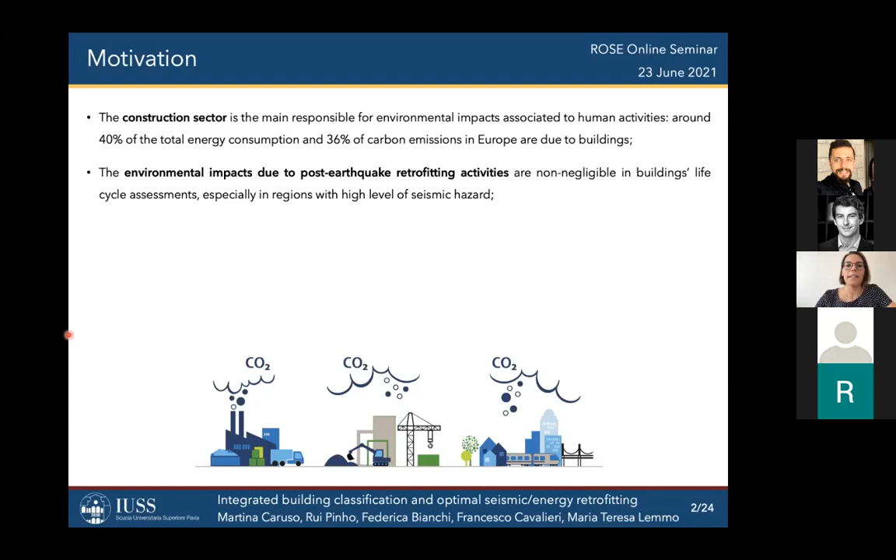When we describe a strong seismic event, we are used to describing it through the number of deaths, injured people, homeless people, or by the economic losses associated to post-earthquake retrofitting activities or to business inactivity. However, we cannot anymore neglect the fact that post-earthquake retrofitting activities do also produce environmental impacts.

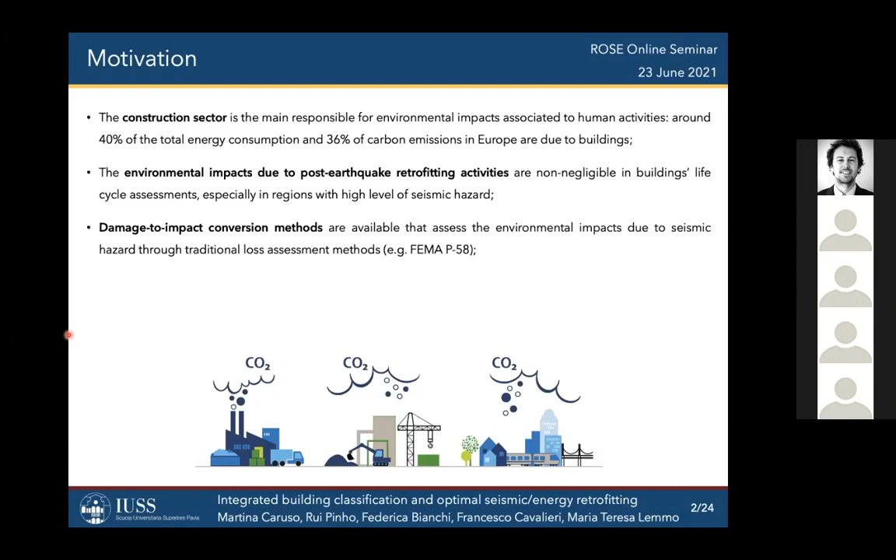And those contributions should be included into traditional life cycle assessment. To do so, we have several methods that allow the conversion of building components' damage into environmental impacts, so that we can use environmental impacts as a decision variable within traditional loss assessment methods.

Lastly, there is a need for a methodological framework for integrated assessments of buildings that consider multiple performances of the building itself. In our discussion, we will include both seismic and energy performances, and also for impact evaluation, metrics that are meaningful for the identification of optimal retrofitting strategies.

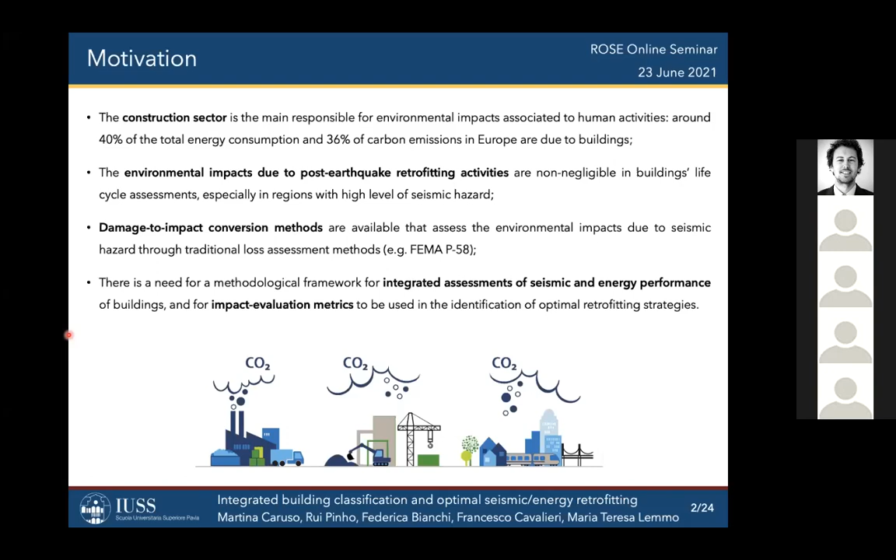So I will start with a brief overview of the life cycle framework that we developed. That is, of course, based on the existing life cycle analysis and life cycle cost analysis procedures, but it includes the contribution of potential earthquakes also.

So the first life cycle stage that we consider usually for buildings is the construction process, which usually includes raw material extraction, transportation of those materials to the factory, and the installation process within the construction site.

Then we can move to the operational phase of the building, which is the phase in which people and occupants use the building. We will define several sub-phases within the operational phase.

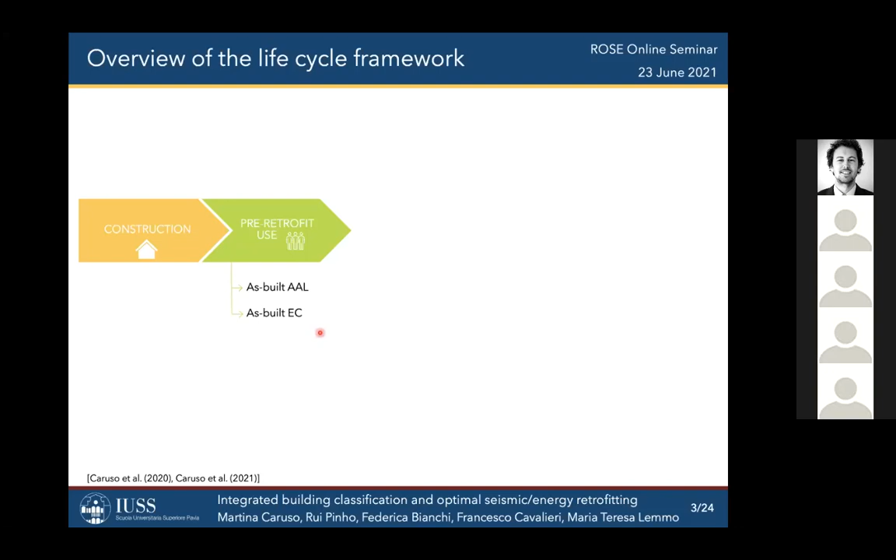The first one is the use phase before a retrofitting intervention is made in the building. In this operational phase, we will consider the contribution of potential earthquakes in terms of average annual loss, what we call AAL, due to seismic hazard, and the energy consumption of the building.

Then we may need to do a retrofitting intervention on the building, which may or may not be consequent to an earthquake occurrence. In that case, we should, of course, consider both post-earthquake repair activities and the retrofitting intervention.

Concerning retrofitting interventions, we may have sole seismic strengthening, or energy efficiency refurbishments only, or even integrated interventions that are aimed at reducing both seismic vulnerability and energy consumption.

So the next step is the estimation of average annual losses and energy consumption, considering the effectiveness of the retrofitting intervention adopted for the building.

Lastly, we have the demolition phase, which is the end-of-life stage of the building, in which we considered the demolition of both construction and retrofitting materials.

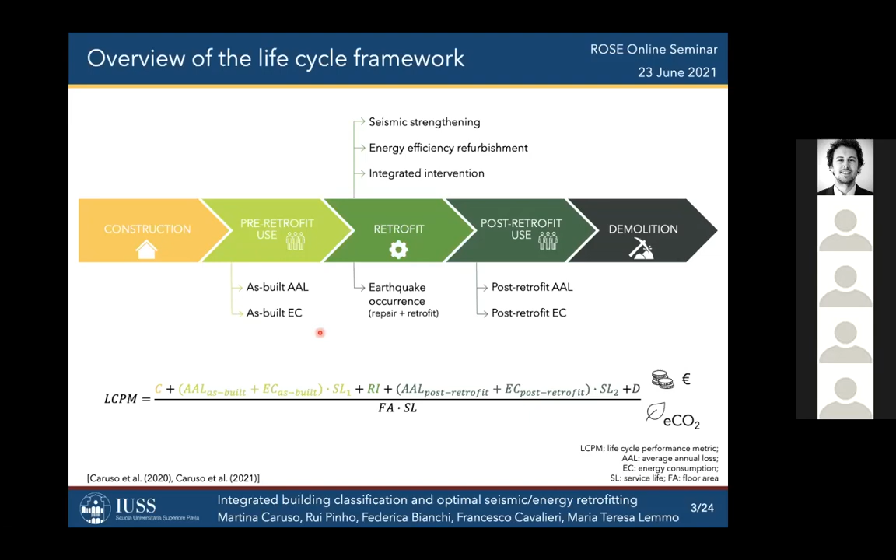So wrapping up, we will have a big summation of the contributions of each of those stages, in terms of the life cycle performance metric, or LCPM, that we decided to use as performance metrics: costs in euros, and environmental impacts in terms of equivalent carbon dioxide.

All those contributions, as you can see, are normalized, just to be more general, by the total floor area and the total service life of the building.

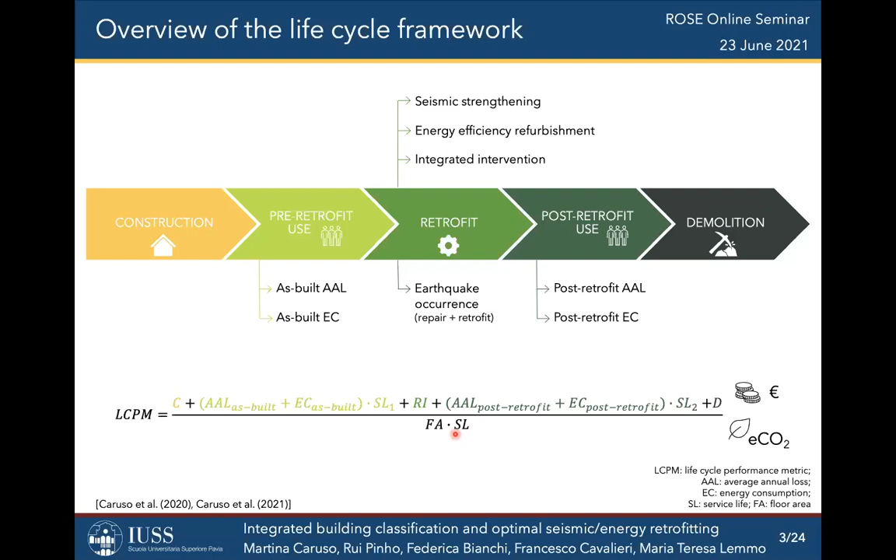This kind of evaluation may be useful when we are comparing different buildings that belong to different building typologies, for example concrete, masonry, or steel, or maybe a newer building compared to existing ones. But if we deal with just a single building, we can focus only on the post-retrofit stages, because the pre-retrofit ones are, of course, the same for a single building.

So when we are evaluating which retrofitting option is the best one for a building, we can introduce a new integrated classification, based on post-retrofit annual costs and emissions, estimated as we previously discussed, which is inspired by already existing energy and seismic risk classification schemes.

But it is quite different, for two main reasons. The first is related to the performance metrics used as a basis for the classes, which are again costs and emissions. And the second is because we are considering seismic and energy performances together in an integrated manner.

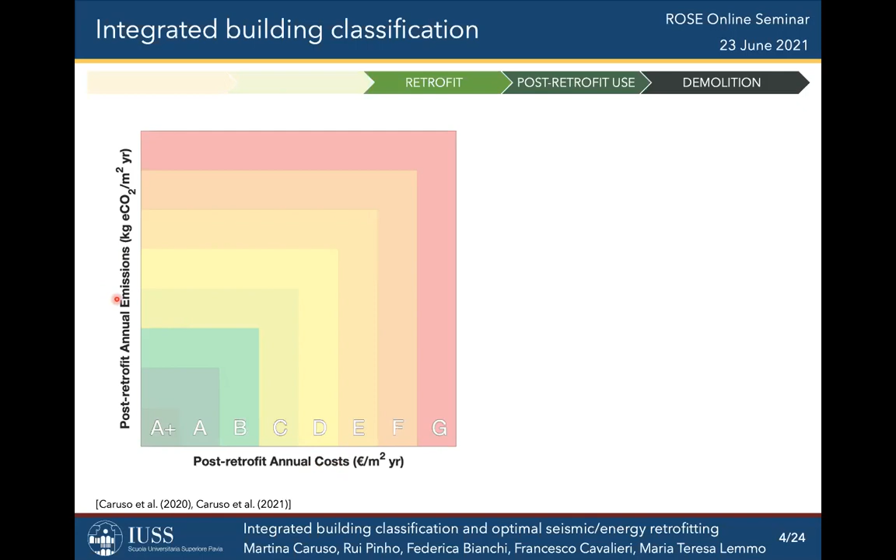So now I want to do a hypothetical example for a building located in central Italy. Assume we have calculated post-retrofit costs and emissions for the as-built configuration, and that we get a class D.

Now we want to design a retrofitting intervention for this building. We can try with a seismic strengthening only, or with a sole energy efficiency refurbishment. What we can see here is that a sole seismic strengthening gives a very high reduction in terms of costs, but a very limited reduction in terms of emissions.

On the contrary, the energy refurbishment gives a very limited reduction of costs, but a very significant reduction in terms of emissions. So what I wanted to show through this example is that, in order to guarantee a class upgrade, we would need an integrated reduction of both costs and emissions, and that just reducing one of those may not be enough.

So considering that central Italy is a region characterized by very high seismic and energy demands, we can also think about an integrated intervention that may guarantee one or even two class upgrades.

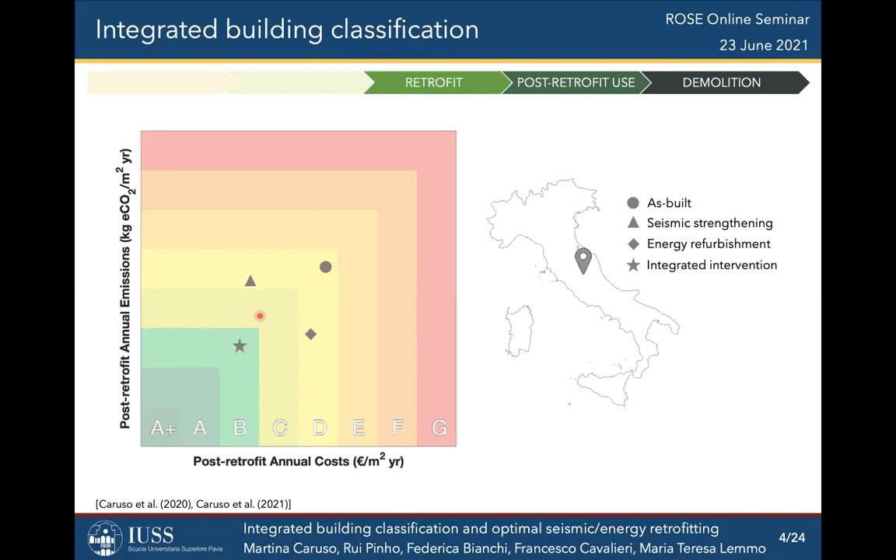To understand better our framework and our proposal for this classification scheme, we will go through the application of the framework to a case study building, which is an existing school building in central Italy, which looks like this. As you can see here, we will go through each step, each life cycle stage.

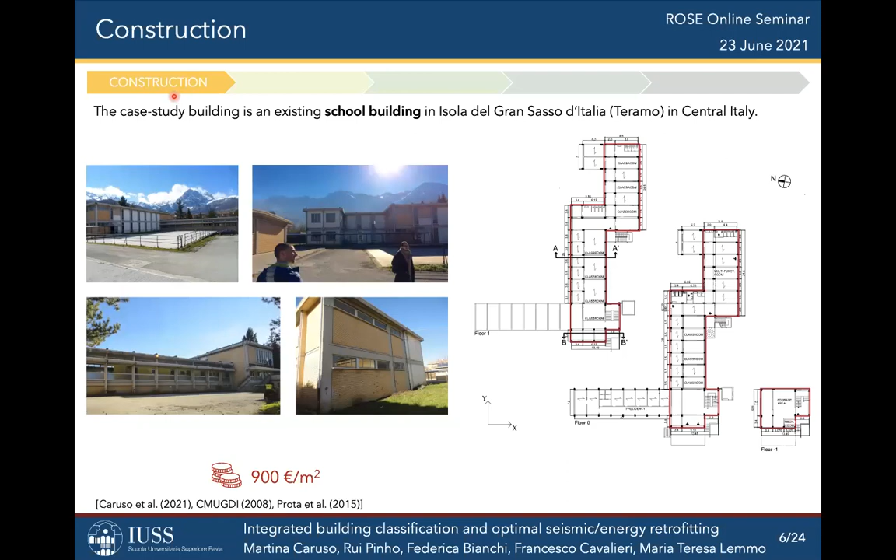For each of those, I will provide economic and environmental estimates. Starting from costs, we assumed a 900 euros per meter squared construction cost for this building. Concerning environmental impacts, we used a specific method for life cycle assessment called economic input-output method, and we used a web tool which is available to perform this method and which is referenced in this presentation.

So what we need to use this method is an estimate of dollars of expense in a specific construction sector, that in our case is the construction of a school building. The web tool will be able, depending on the quantity of expense in that sector, to give estimates of environmental impacts per $1 million of expense.

What we can immediately understand is that this method is quite approximate because it is only based on the assumption that, given an expense in a sector, we are able to calculate the corresponding environmental impacts. We deemed it was fine for our first application, but in the second application we are working on these days, we decided to perform a more accurate life cycle assessment, called bill of material life cycle assessment, that consists in the definition of all the components and all the materials within the building to get the corresponding environmental impacts.

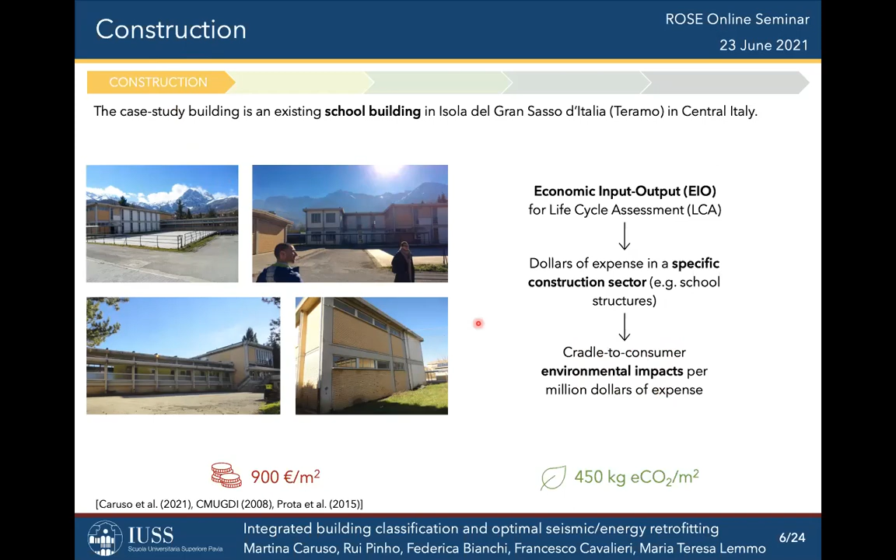Then we can move to the operational phase before the retrofitting intervention is made. Again, here we will estimate the average annual loss due to earthquakes and the energy consumption. Starting from the earthquake loss assessment, we decided to use the FEMA P58 approach.

I'm sure most of you are familiar with this approach, so I will not go too much through the details, but I will just describe in general the steps that are part of this approach. The FEMA P58 approach is a fully probabilistic method to estimate losses that are expected in a building given the seismic hazard at the site.

So once we know the building and we know the site of interest, we can perform step one, which is the seismic hazard analysis, in which we are mainly answering the question: how frequently will an event of intensity IM occur in our site?

Step two is the structural analysis of the building, for which we need a numerical model for our building, and we need to perform structural analysis that may be nonlinear static procedures or pushover, or nonlinear dynamic analysis. The result of step two are the so-called engineering demand parameters, or EDP, which result in the building due to the occurrence of the event defined at step one.

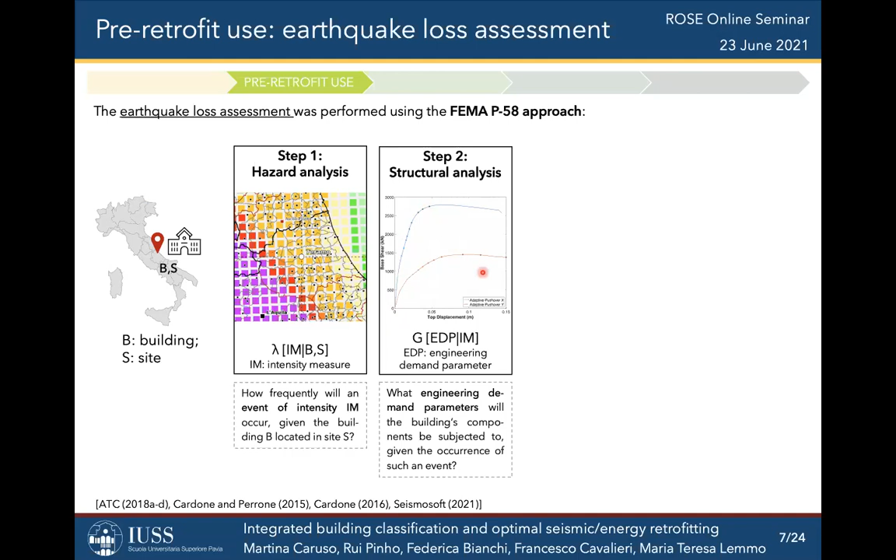For our application, we used pushover analysis, and we used the N2 method to assess the EDPs at 9 different seismic intensity levels. EDPs may be, for example, interstory drift ratios or floor accelerations or velocities.

Step 3 is instead damage analysis. At this step, we need to collect an inventory of vulnerable components in our building. In our application, for example, we considered structural reinforced concrete components like beam column joints and masonry non-structural components like external infills or internal partitions.

For each component, we need the so-called fragility function that provides the level of damage that is expected in the component given the attainment of the EDPs defined at the previous step.

Lastly, step 4 is the loss analysis. For this step, we need instead what we call consequence functions. So for each damage state considered for each component, we know which repair activity we would need to repair our components. The consequence functions are, for example, in terms of costs or carbon emissions that are produced by the repair activities needed to repair each damage state considered.

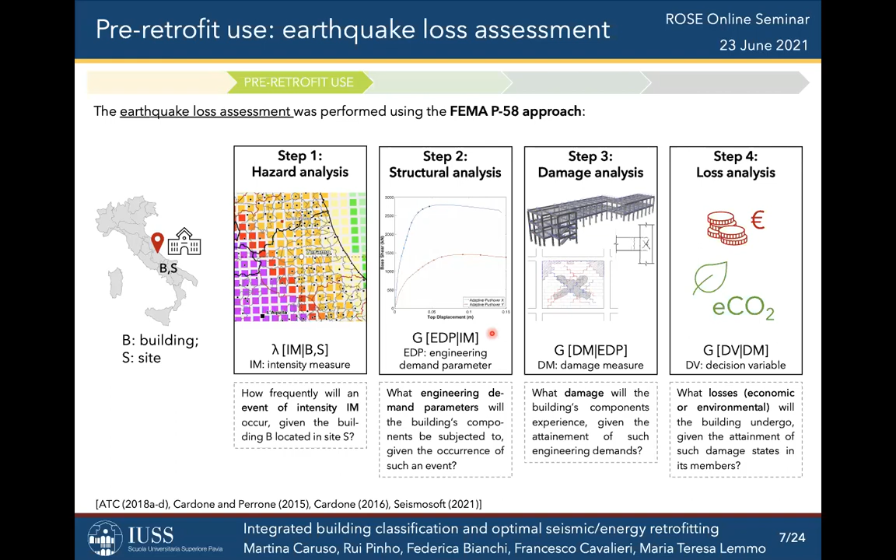So the results are finally in terms of loss curve. This is the economic loss curve, and in terms of average annual loss, which was estimated to be around 5,000 euros per year, or in other terms, 0.38% of the replacement cost.

Concerning environmental impacts, I want to spend just a few words on how we developed the consequence functions in terms of equivalent carbon dioxide emissions. Once we had a detailed description of the repair activities needed for each component, we could estimate the quantity of materials needed for each repair activity, and finally use the inventory of carbon and energy database to get our estimate of environmental impact per kilos of material.

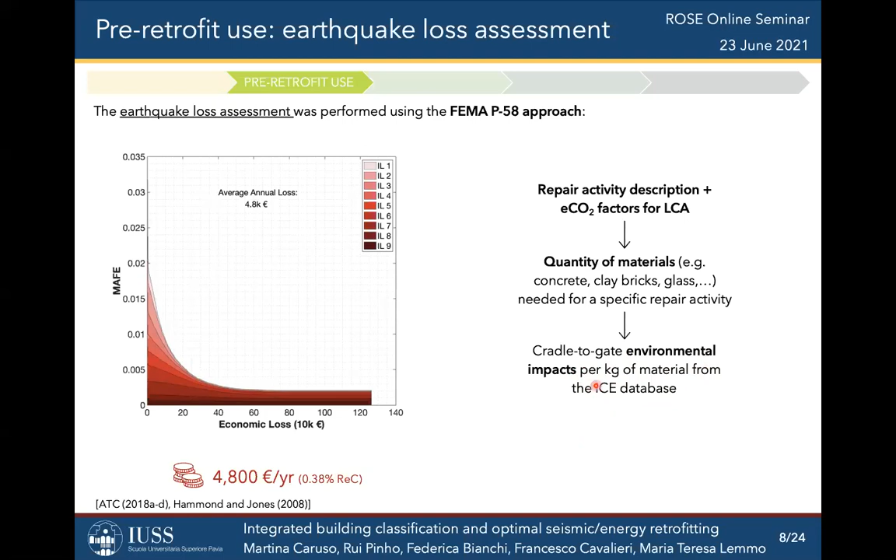The results are again in terms of environmental loss curve, and the average annual emissions expected in the building are more or less equal to 2,000 kilos of equivalent carbon emissions per year. Also 0.28% of the replacement impact.

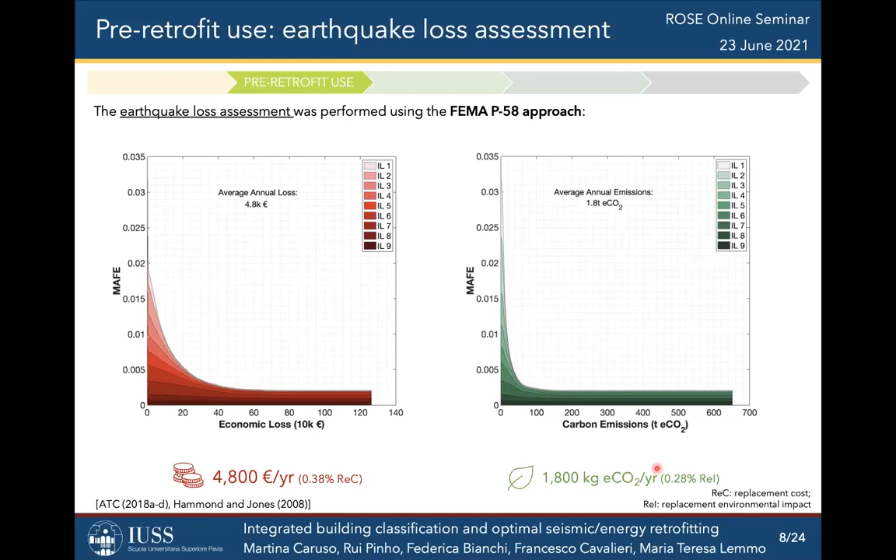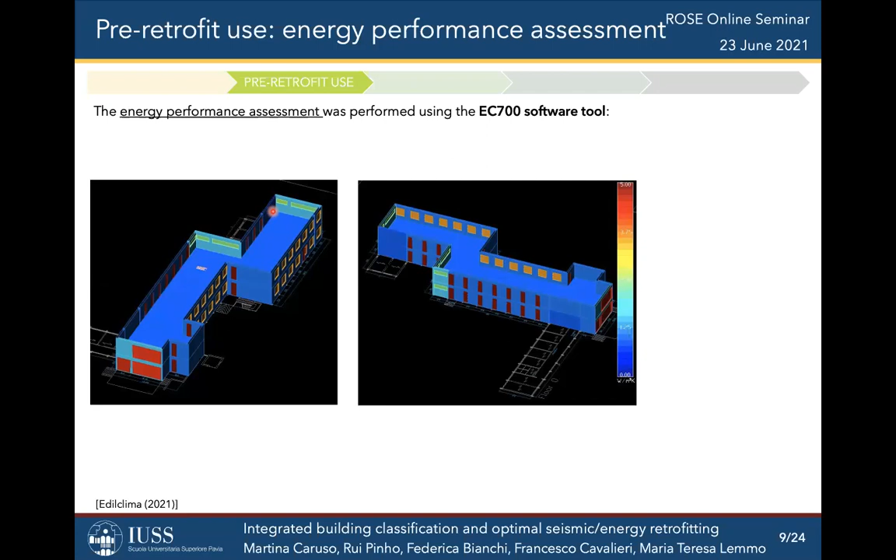Concerning instead the energy performance assessment, we decided to use a software called EC700, developed by Edilclima. We built our model and performed energy calculations in static conditions so that we could estimate the energy needs for the building and the energy class, which in our case was E. For this first application, we just focused on the energy needs for heating the building, whilst in future applications we want to include energy needs for cooling, ventilation, illumination, and so on. This was just for the sake of simplicity for the first application.

The results are shown here: 27,000 euros per year and 53,000 kilos of equivalent carbon dioxide per year. What you can immediately notice is that there is a difference of about one order of magnitude with respect to the estimates resulting from the earthquake loss assessment.

And the reasons we found were mostly two. The first one is related to the specific architectural configuration of the building, which features very large openings along the building vertical envelope. The second reason is related to the type of analysis we did, which was in static conditions. So we assumed an average temperature value to be constant within the season considered to estimate energy needs for heating the building. So those results may be quite conservative.

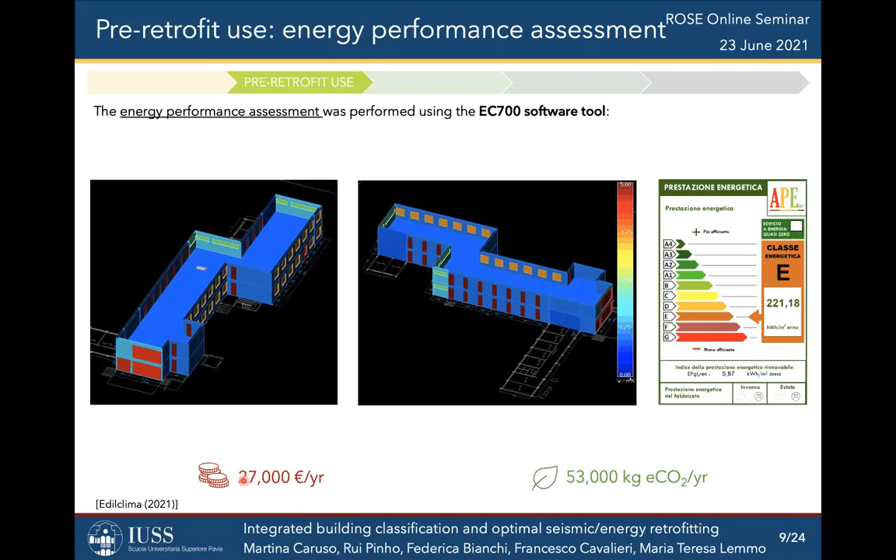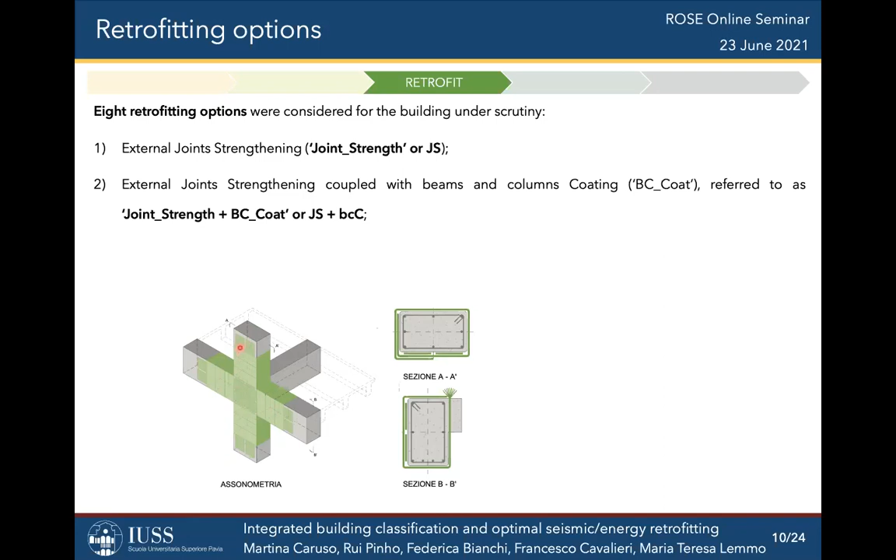Then we designed 8 different retrofitting options for this building, including seismic strengthening options, energy efficiency refurbishments, but also integrated options. The first one is a strengthening option because it consists in the strengthening of external beam column joints through the application of steel reinforced polymer, or SRP sheets, as you see here. The second option is just an extension of the first one, in the sense that we proposed to extend the application of such sheets all along the external columns and beams. This is not a solution of common practice, but we were interested in including it because we were trying to avoid the formation of thermal bridges due to the material discontinuity over time between SRP and concrete.

The third option is instead an integrated option that couples the external joint strengthening with the application of a 2 centimeter thick insulation layer all over the vertical building envelope.

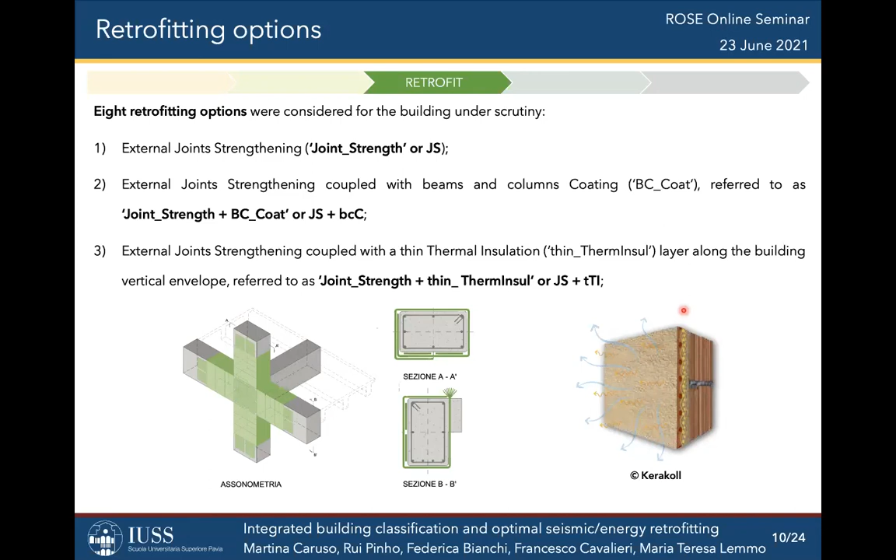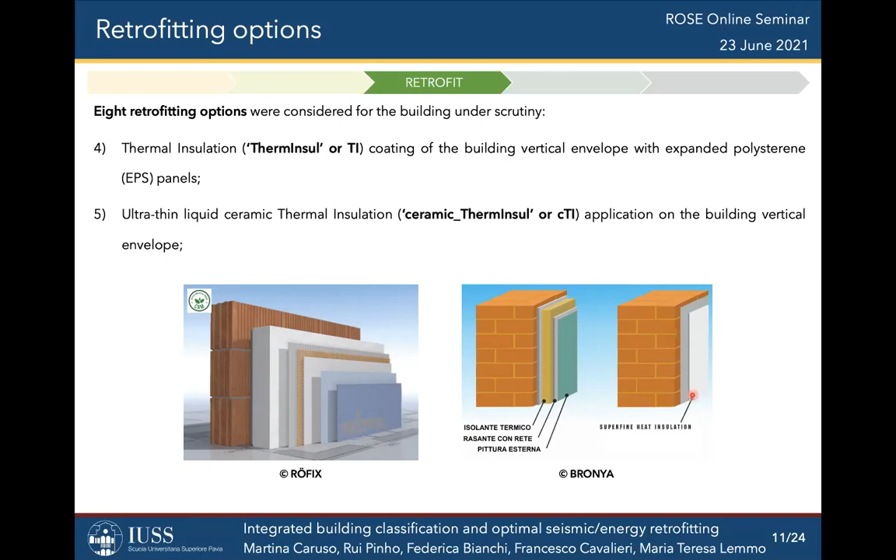The fourth and the fifth options are instead energy efficiency refurbishments. The first one is a traditional solution for thermal insulation by the application of expanded polystyrene panels, or EPS panels, whilst the fifth option is an innovative solution with a 2 millimeter thick application of a ceramic layer all along the building envelope that performs equivalently to an 8 centimeter thick EPS panel.

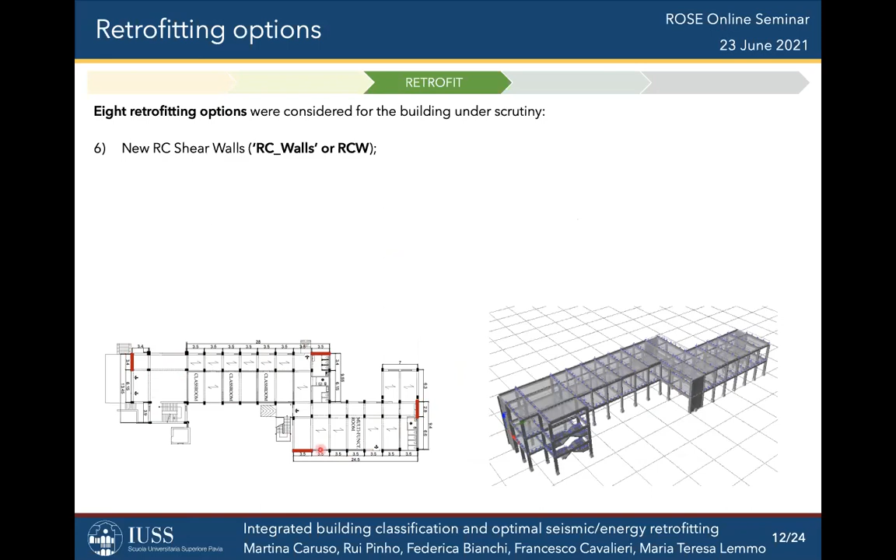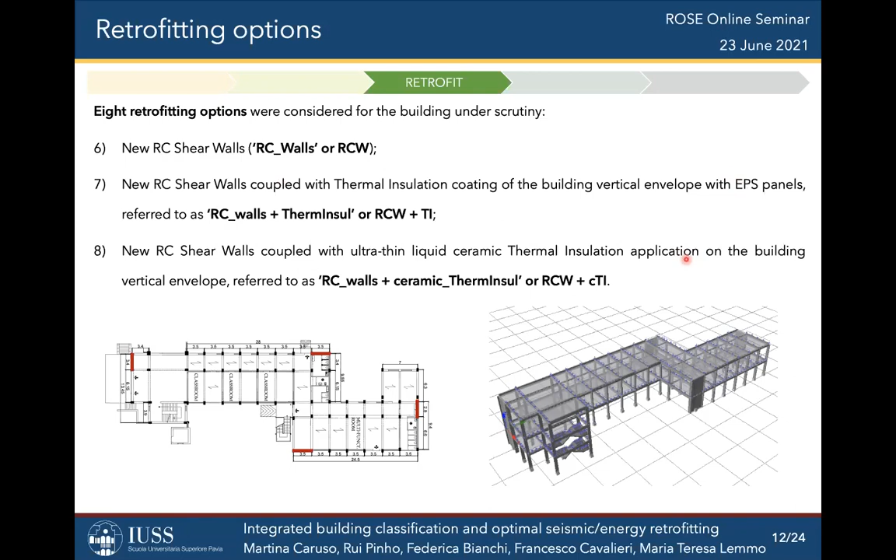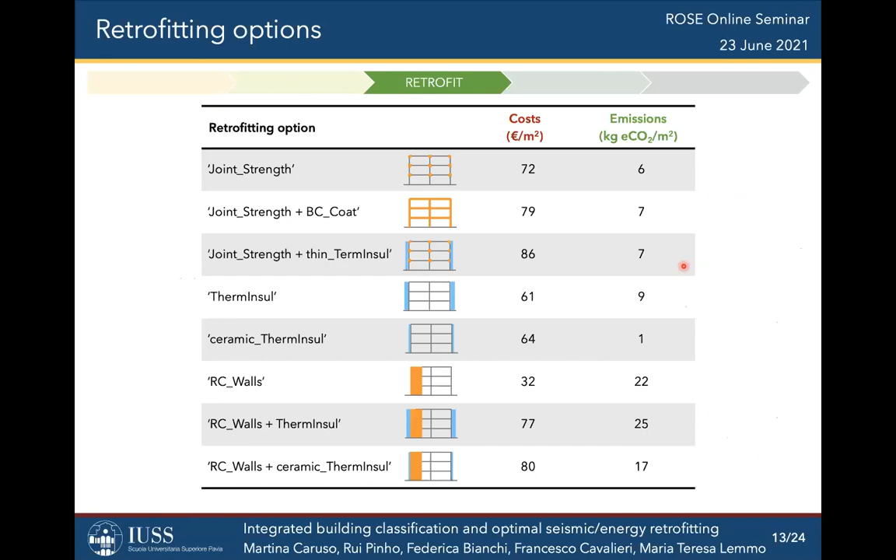The sixth option includes the introduction of 4 reinforced concrete shear walls in our building, 2 per principal direction, as you see in plan and in the numerical model. The 7th and the 8th options are integrated options that couple reinforced concrete shear walls with EPS panels and ceramic application, respectively. For each of those retrofitting options, we could estimate both costs and emissions due to the installation process.

Then we can move to the use phase after the retrofitting intervention. And it is clear that the results of the earthquake loss assessment and of the energy performance assessment will be influenced by the effectiveness of the different interventions.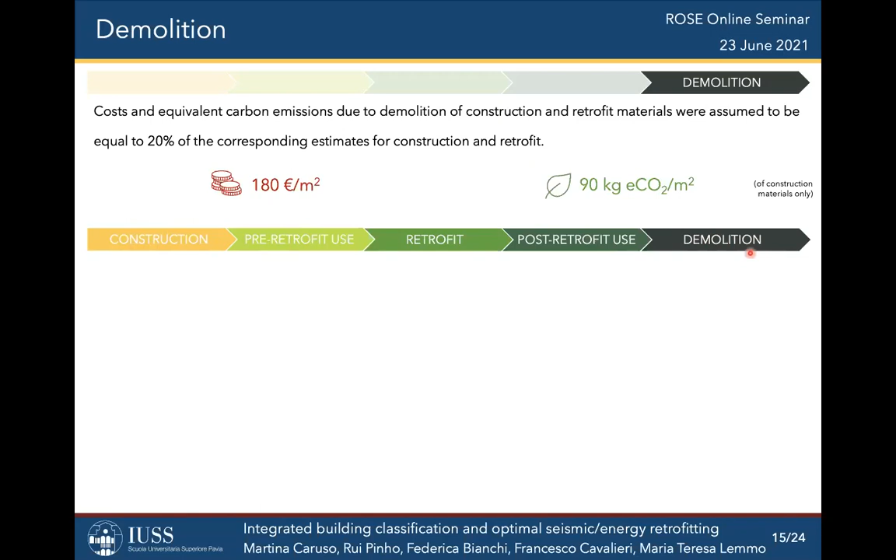However, we know that the demolition of buildings produces a very large amount of waste, and we cannot imagine today that all this waste would just be transported to landfills without any alternative options. So in future applications and developments of the framework, we will move to a circular life cycle, which includes a new phase consisting of the reuse and recycling of demolition materials. This will be perfectly coherent with circular economy principles, because the demolition waste will be reused and recycled and put back into the market to start a new life cycle for another building or product in general.

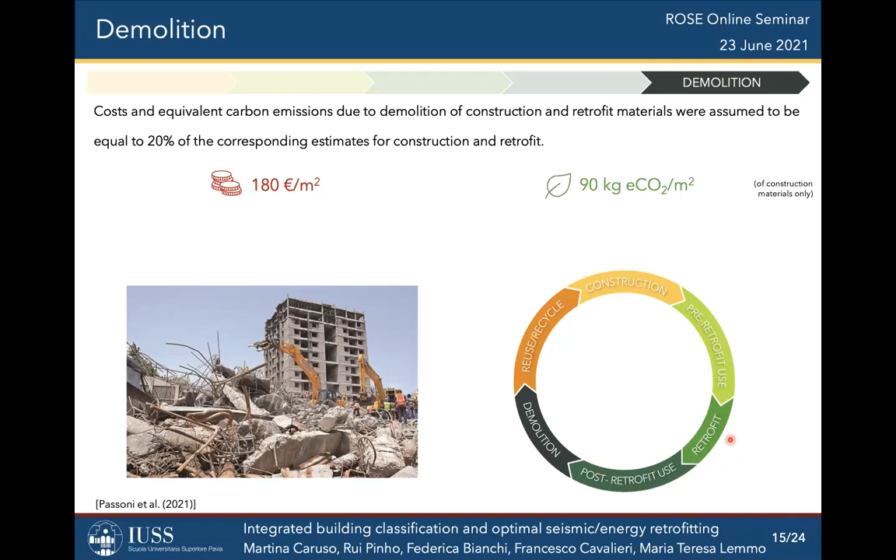Another thing I want to say is that up to now we just considered retrofitting options that are traditionally used in engineering applications. However, several researchers today, like Passoni et al., are working on more sustainable retrofitting solutions designed so that after demolition of the building, we can completely reuse and recycle those retrofitting materials. This is one of the best things we can do when dealing with existing buildings.

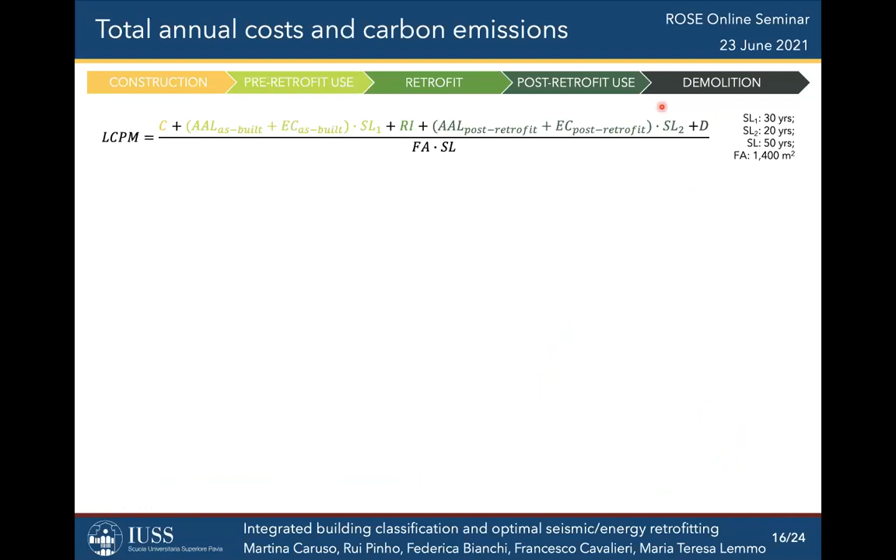Coming back to our framework, now we have all the contributions we are interested in. I will show the results for the as-built configuration and for each retrofitting option. But as I said before, these evaluations may be useful when comparing different types of buildings, because the pre-retrofit phases are of course the same for a single building. So I'm presenting these results just for the sake of completeness.

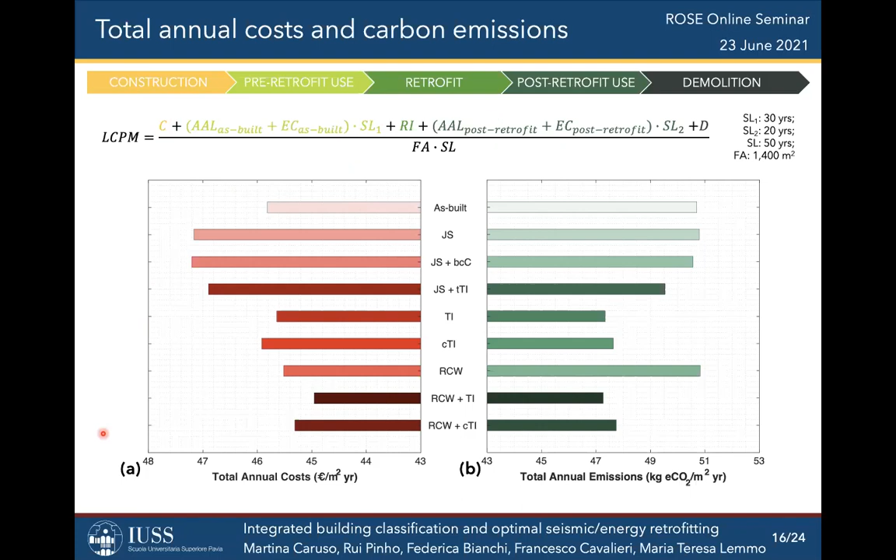If we consider that we are interested in identifying the best solution for a single building, in our case the school building in central Italy, we can just focus on the post-retrofit stage and use costs and carbon emissions as meaningful performance metrics to select the optimal retrofitting strategy.

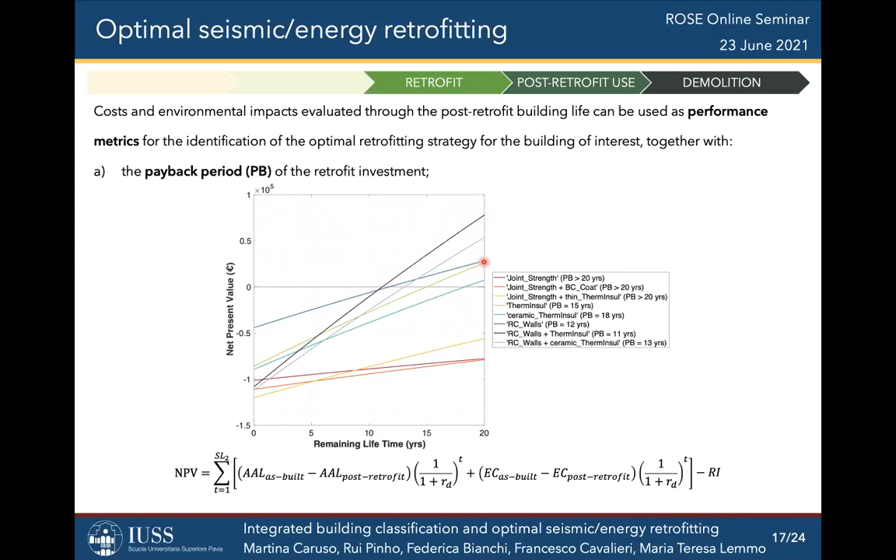The second decision variable we can use to support selection of the optimal retrofitting strategy is the average annual loss of life due to seismic hazard, because we cannot neglect the fact that earthquakes have very serious consequences on society and the community related to life safety and life protection.

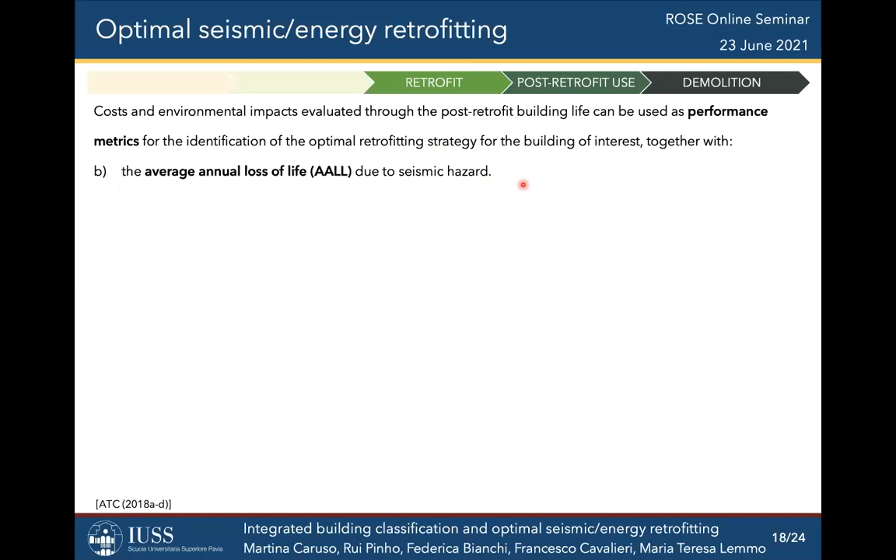To do so, we use the casualty model included within the FEMA P58 approach, for which we first needed a population model. What we are interested in here is how many people are expected to be within the building at different hours of the day and different days. In a school building, it is very evident which are the times of day and days of the week where we have the majority of occupants.

What we need secondly is the definition of some collapse modes for the building, which we defined according to the suggestions of the FEMA P58 guide manual.

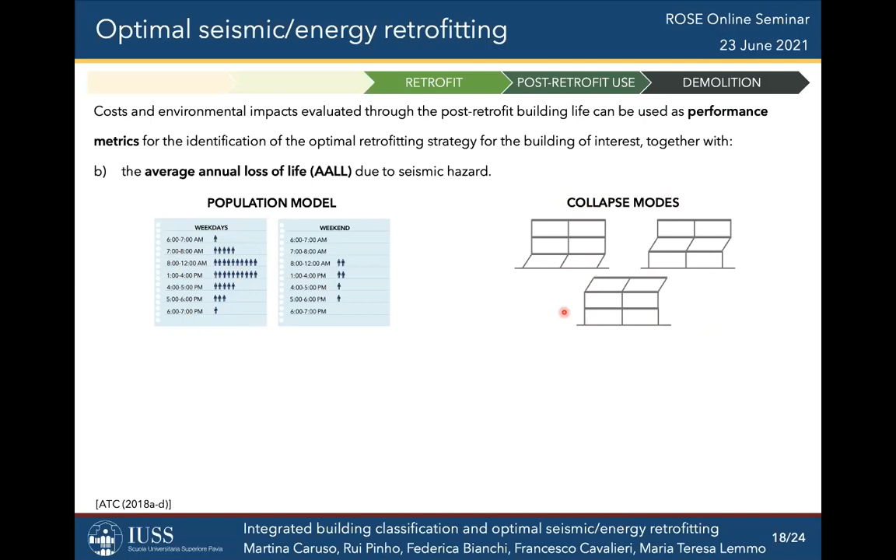And finally, for some components, we also defined a fatality rate. For example, for masonry infills and partitions, we defined an area possibly affected by the collapse of the component itself. We assumed in a conservative way that such area will be equal to the dimension of the masonry, infill or partition, assuming that all the component is transferred into debris after the collapse. And then we assumed a fatality rate equal to 0.9, as suggested by the FEMA P58 guide.

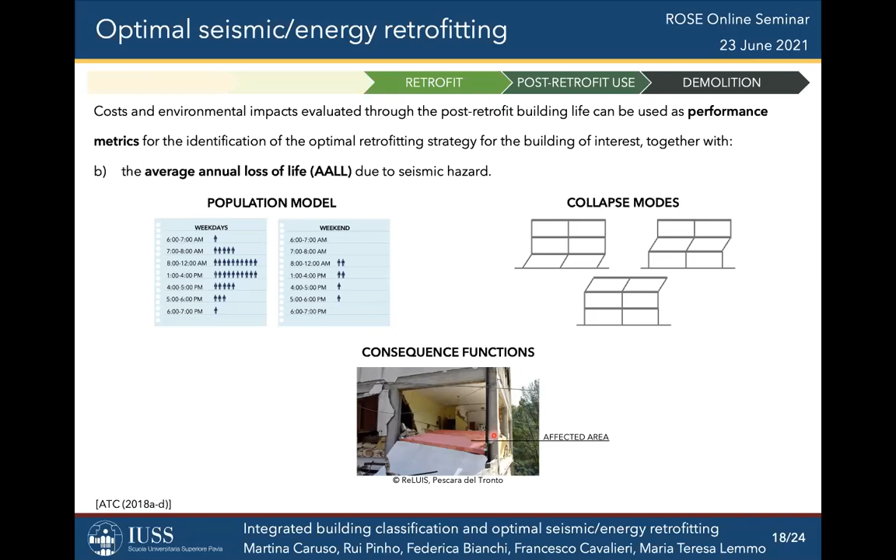So now we can finally look at the results in terms of post-retrofit annual costs and emissions, but also in terms of payback periods, which we normalized by 20 years, which is the post-retrofit life we assumed for our building, and the average annual loss of life, which is normalized by the total number of people expected within the building.

So how do we select the best option? The best option may be the one that produces the highest reduction in terms of costs and emissions compared to the as-built configuration, and also the one that features the lowest payback period and the lowest average annual loss of life. What we can see is that the best option for our case is the integrated option with reinforced concrete walls and EPS panels.

If we just look at the first plot, one could argue that thermal insulation only may also be considered for this building, because it results in a good reduction of costs and emissions also. And it is also much less invasive compared to the introduction of new reinforced concrete walls.

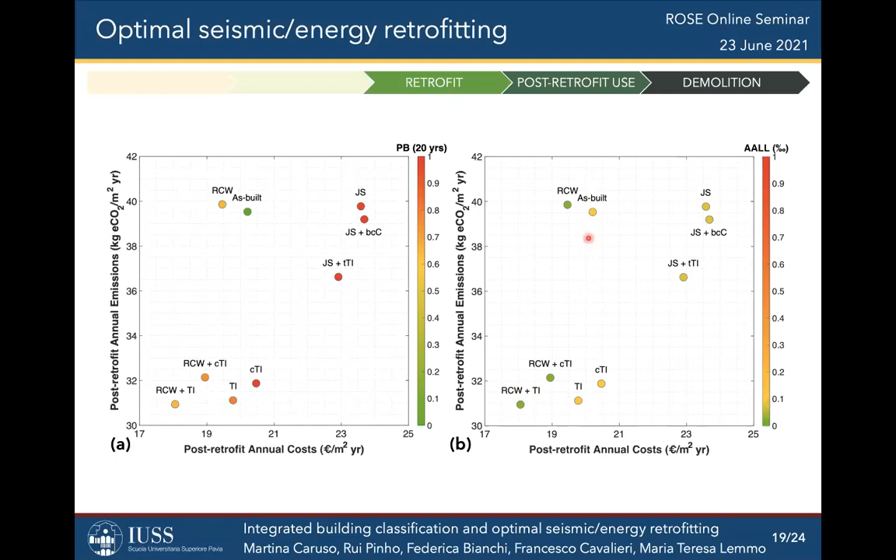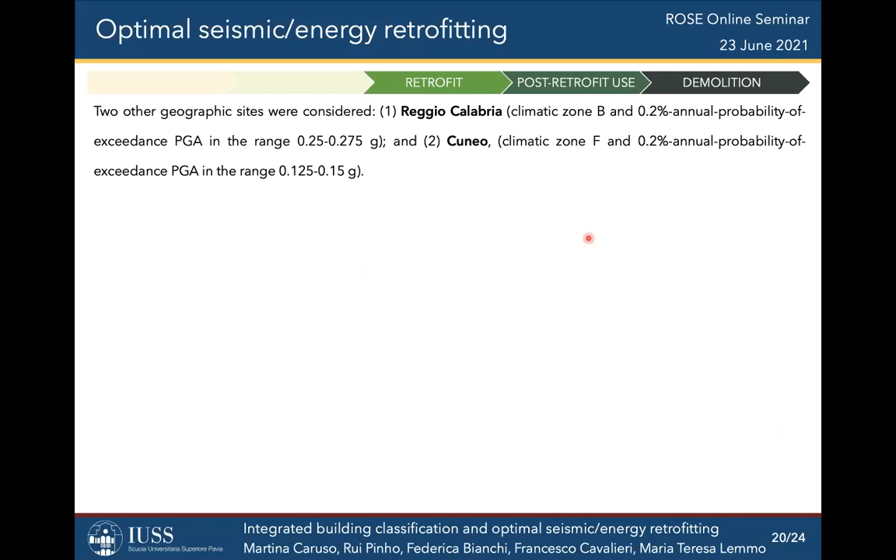We decided to move our building also to other cities to see how the results could change. We selected two cities, Reggio Calabria and Cuneo, because we were interested in varying climatic and seismic conditions to see how the results would change. And here is what we got.

From those plots, we can see the different effectiveness of the different options in the three cities. But what is much more evident is the increasing trend of costs and emissions for increasing energy needs over the year, because Cuneo is the city with the coldest weather compared to the other two. So this is maybe again due to the specific configuration of the building we are studying here.

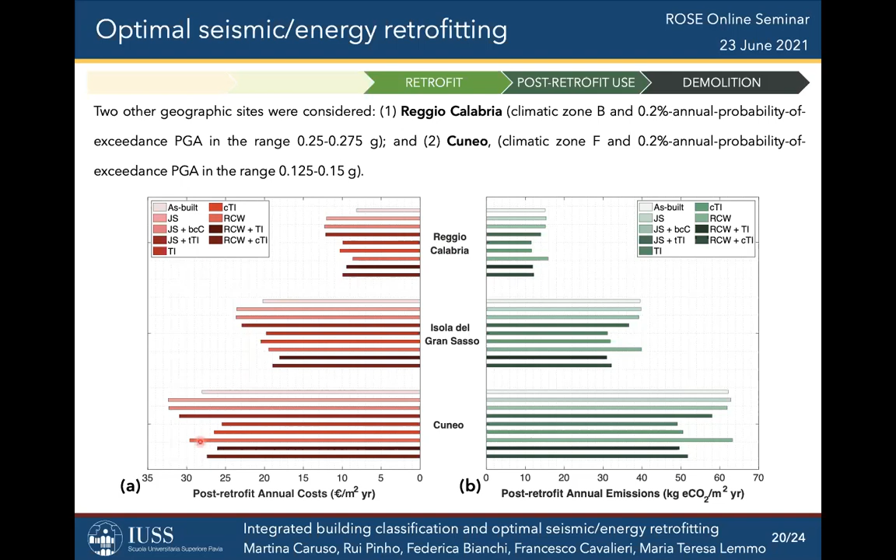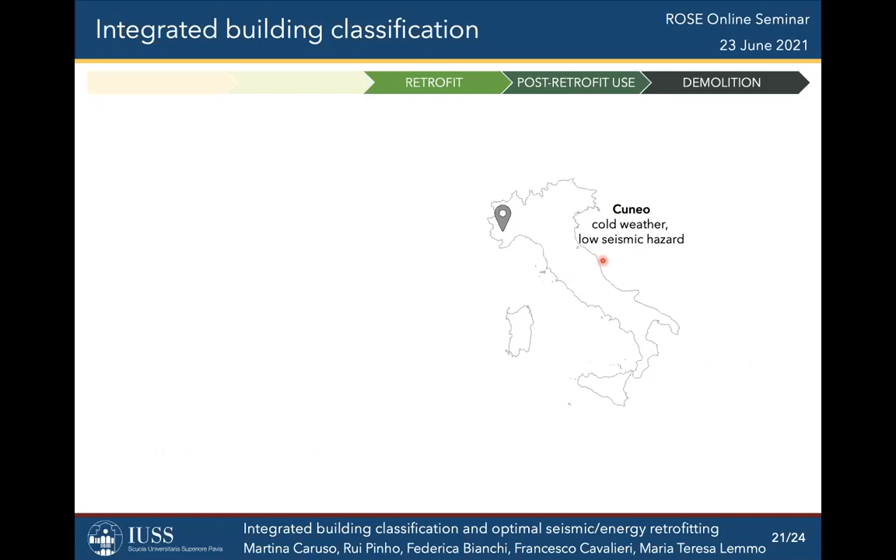Now I will just focus on some of the results presented in the previous slide, considering the building located in Cuneo, because they are quite interesting, as you will see. The results are superimposed on the potential classification scheme we are proposing.

What we can see, for example, for the joint strengthening option only, is that there is not an improvement in terms of costs and emissions compared to the as-built configuration. This is maybe due to the fact that this kind of option is quite costly and carbon emitting, especially in a region with these characteristics, with high energy demands for heating and with lower seismic demands.

Instead, what is interesting next is that if we plot the results for thermal insulation only and for the integrated option with concrete walls and EPS panels, we can see that the results are almost coincident. That is again due to the specific characteristics of the city of Cuneo, because thermal insulation only is strongly reducing costs and impacts in the same way as the integrated option.

However, if we recall what we previously said about the average annual loss of life, we can again consider the optimal solution as the integrated one, since it also tackles life protection.

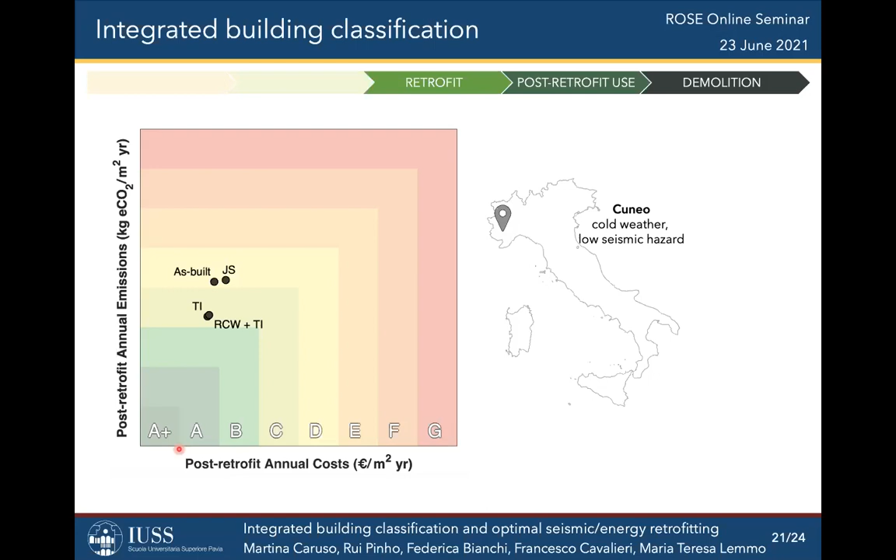So now I'm at the end of the presentation. I will draw some conclusions. The first one is that the framework is readily applicable to any kind of building, any building typology, and it can be used as a basis for a new integrated classification for buildings, which is based on life cycle economic and environmental impacts, and that integrates seismic vulnerability and energy efficiency for buildings.

And hopefully it can go beyond the currently independent energy and seismic classification systems.

In addition, we tried to demonstrate that expenses, monetary expenses and equivalent carbon emissions can be meaningful performance metrics for the identification of optimal renovation strategies for buildings, together with the payback period of the retrofit investment and the average annual loss of life due to potential earthquakes.

Integrated renovation strategies are always convenient, especially in long-term evaluations in terms of long-term benefits. And lastly, the geographic location can really influence the results, the economic and environmental evaluations. It is therefore possible that the definition of value ranges for the integrated classes we were presenting before might vary from one location to another.

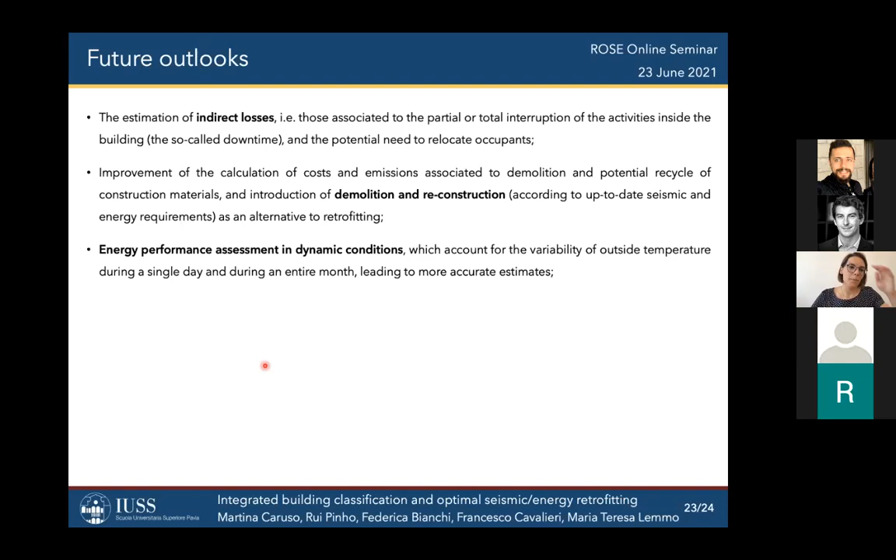As previously discussed, energy performance assessment in dynamic conditions that account for the variability of outside temperature during a single day or during an entire month. And finally, the extension of the application of the framework to a group of existing buildings, in order to further explore the potentials of the method and of the classification we discussed.

So I'm at the end. Thank you very much for your attention. Now, if you have questions or doubts, I'm happy to answer.

Okay, thank you very much, Martina, for a very nice presentation. So, do we have any questions or comments from anybody attending? I think, as usual, I think I will have to.

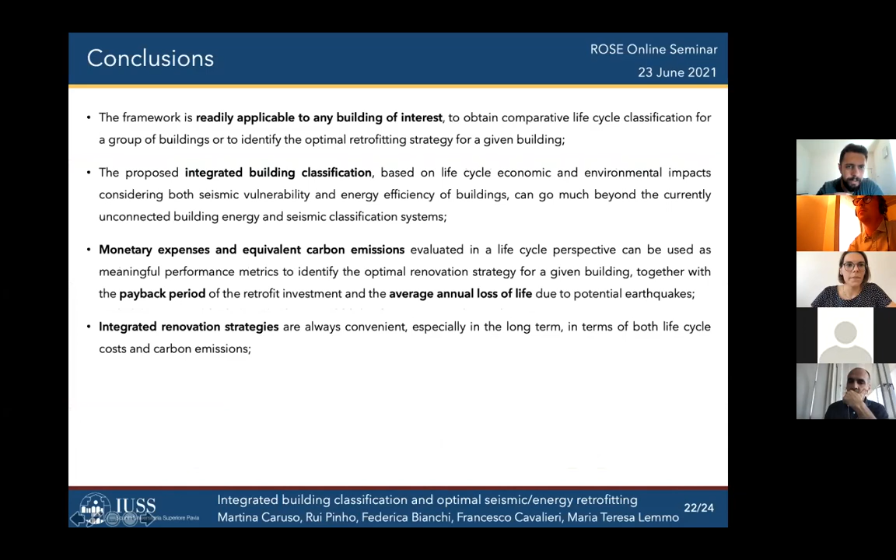Hi, Martina. Thanks a lot for the presentation. I just want to ask you about the economic input-output method. You mentioned that it is specifically for the US, but that you apply a conversion to make it fit what you are calculating in your study. Could you please tell me more about this conversion?

Yes, just a second, let me come back to this. I used a conversion factor to translate the expenses we had in euros into dollars, using the commonly used conversion factors from euros to dollars. Another thing we did is related to the year reference of the web tool, because in this specific web tool, the expenses were referred to 2011.

So we had also to include a conversion factor of dollars from 2011 to 2021, which was approximately equal to 1.4, more or less. Okay, so you did the first currency exchange from euros to dollars, and then you accounted for the time effects on the money because there are interest rates and so on. The data within the web tool were available for 2011. Yeah, okay, thanks a lot. You're welcome.

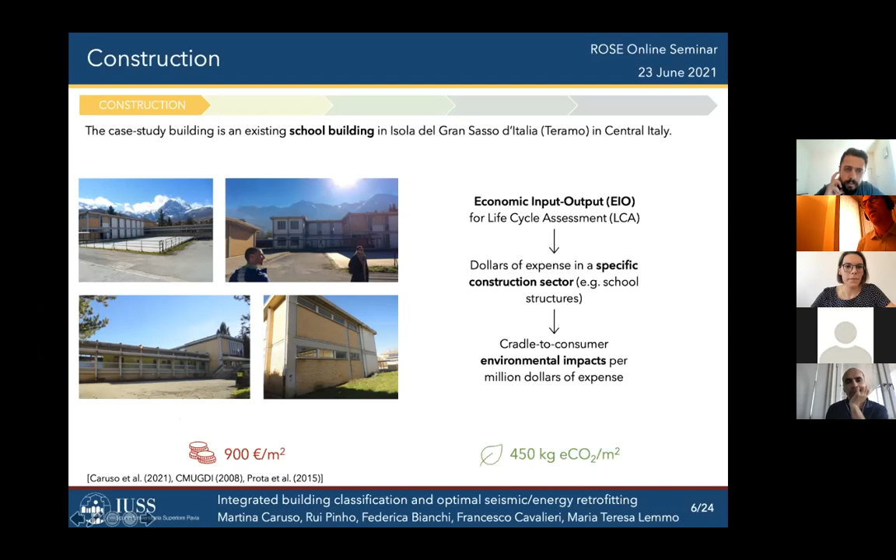Okay, thanks, Karim. I was going to ask you a quick comment related to what you were showing here, Martina. In the case of seismic loss estimation, you mentioned FEMA P58, which is a common method that people use. So there is that method, and then there are some simplified methods to do loss estimation if somebody doesn't want to implement each of these four steps in a lot of detail, so that they can get maybe a quick answer, but not a bad one.

In the case of the environmental loss estimation or assessment you were showing, you mentioned the economic input-output method. So were there any other methods that could maybe be more simplified to make that more accessible, or did you look at anything else, and what would be the options on that side of things?

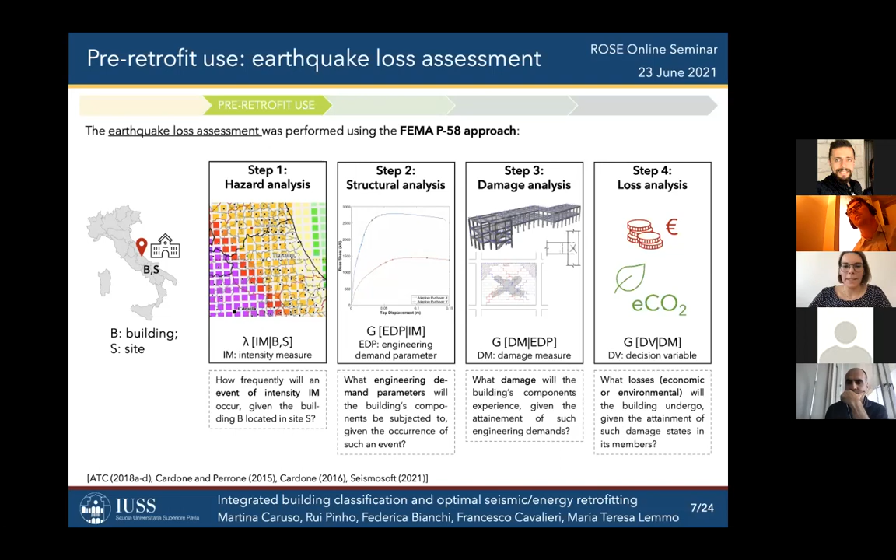Okay, first of all, I want to say thank you, because I forgot to mention that anyone could perform the calculations within each module in the way they prefer. So here I decided to apply the FEMA P58, but anybody can use other methods. Concerning environmental impacts, I wrote something here.

We tried to calculate the consequence functions in terms of environmental impacts, both using the EIO method, as we discussed for construction, but the final consequence functions we used within the calculation were those I'm explaining here.

Once we know the repair activity, we gave a rough estimate of the quantity of materials needed to perform this activity. I started from the fragility functions and the definition of repair activities given by Cardone et al., for reinforced concrete and masonry components, and tried to calculate how much concrete or clay bricks I would need to perform the repair.

I used a database called the Inventory of Carbon and Energy, which is freely available online and reports environmental impact data for materials, such as kilos of equivalent carbon dioxide per kilo of material. This is good because it collects data specifically for the European region, so I was happier to use this method since it was more specific for Europe.

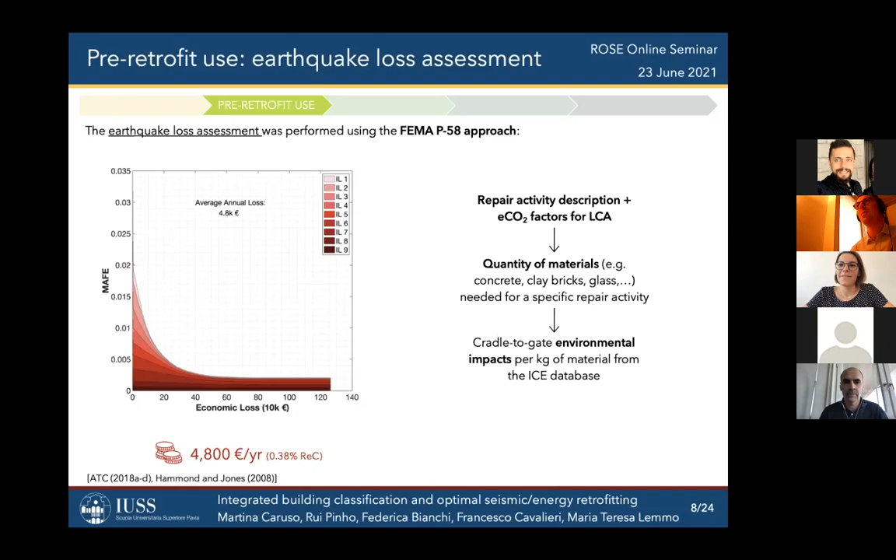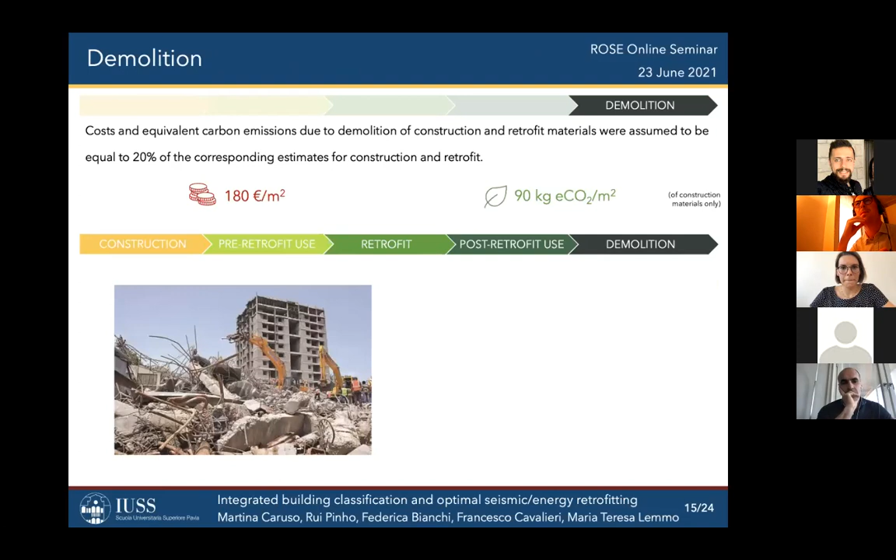And this is also interesting because the thermal insulation is just giving the same result as the integrated option, just because Cuneo has a low level of seismic hazard whilst having higher demands of energy for heating.

In terms of those retrofitting solutions, you described exploring some seismic options, some environmental ones, and some hybrid ones. For the seismic ones, many listening would be familiar with what they are, and for the environmental ones, some options would also be available. But for the hybrid ones, is there any kind of guideline or indication for knowing which would be a good combination of both, or is it something you need to try and see for yourself with these kinds of assessments?